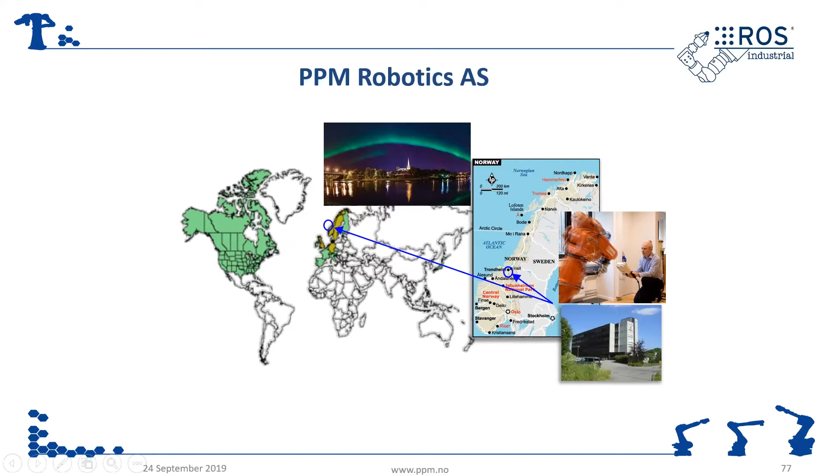We joined ROS around 2 years ago, I think, and we have had a lot of good experience using it. That's why we decided to support the ROS Industrial Consortium and become an active member, also developing and participating in several events.

We use ROS in almost every one of our projects now. We built up this knowledge from our previous projects, which included grinding, milling, welding, or palletizing projects. Currently we are developing technology for our partners for welding applications of huge structures, especially for hydropower turbine welding.

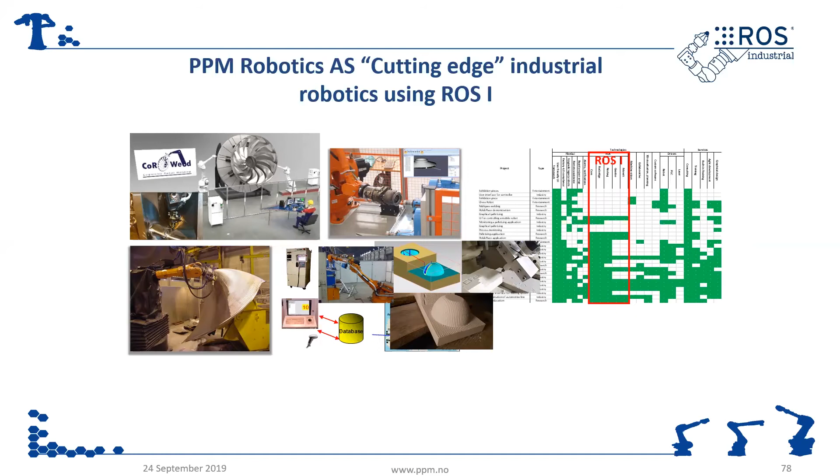So ROSWeld is for one-of-a-kind production robot welding. You will see at the bottom an ongoing process. This is from our previous project, but we developed it further in ROS and made it available for the community.

We focused on usability and also on enabling technology for multi-robot welding applications in ROS. What we want to achieve is the ability to plan, monitor, and control such projects, utilizing the advantages of ROS technology, but also extending the capability of our software and making it more compatible with different devices we encounter during integration at different sites.

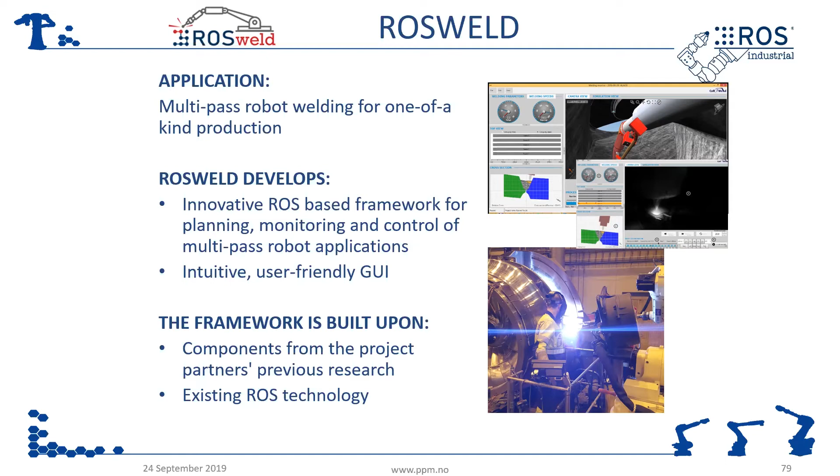So ROSWeld is an FTP project supported by ROSin Europe. We have 3 partners from Norway. We are the champion of the project, PPM Robotics, and we are coordinating the project and developing it.

We have a partner, Mechatronics Innovation Lab AS. It's the catapult center for industrial robotics in Norway. They're located in the South, and as their name suggests, it's an innovation lab for introducing new technologies to local companies. The other partner is Rainpower Norge.

They are our main manufacturing and industrial partner. They produce hydropower turbines, and we have had an ongoing collaboration since 2006. The project started last summer, and we finished the main development of the code. Currently we are working on integration and the application at our partners.

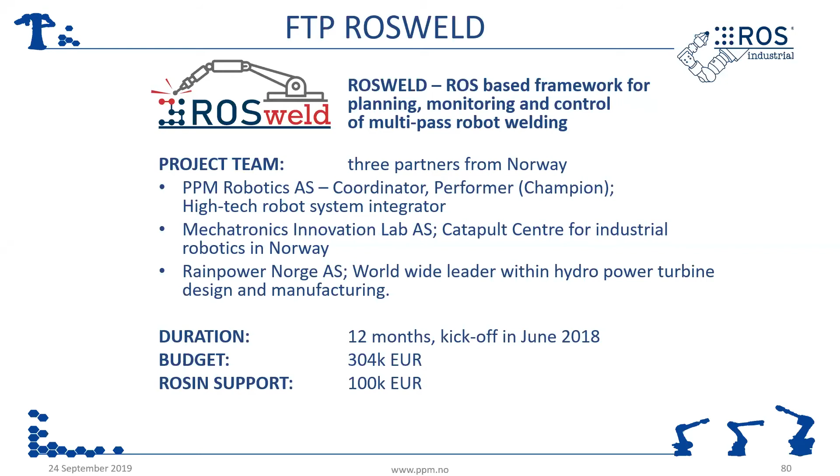So the main goal of the project is to bring this kind of software to an industrial level, as is general for ROS Industrial. We are aiming to bring the planning, monitoring, and control software. We are also integrating the components we would use for welding. Some of them are not integrated yet into ROS, so we deliver them as new, and also provide training materials as they become ready.

The pilot project would be at Rainpower, and the generic setup would be implemented at Mechatronics Innovation Lab.

So how is this software package built up? We created the user interface in FlexGUI, which is our user interface, and it is enabled to plan the process itself. Then we use the simulation tool to simulate the motion of the robot in the virtual environment and enable collision detection. Then the control integrates all the external hardware, including the robot arm, the welding power supplies, cameras, laser scanners, and input devices.

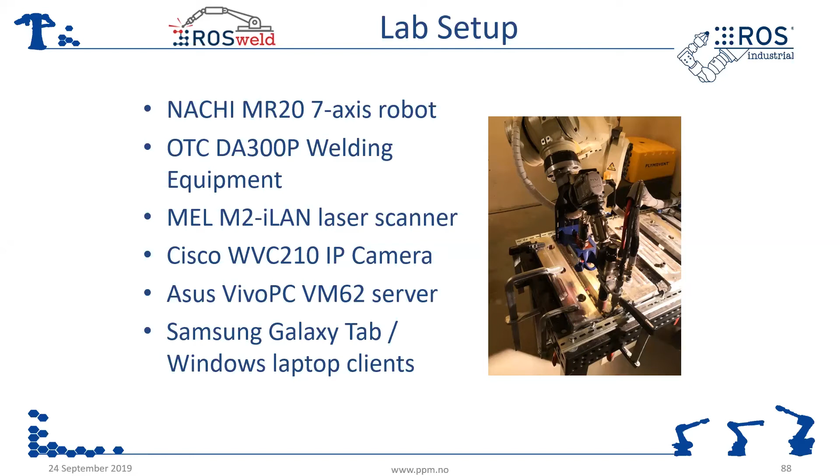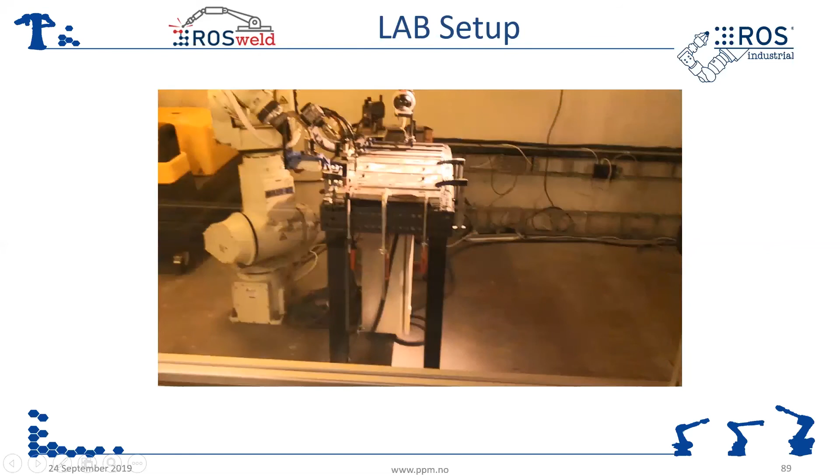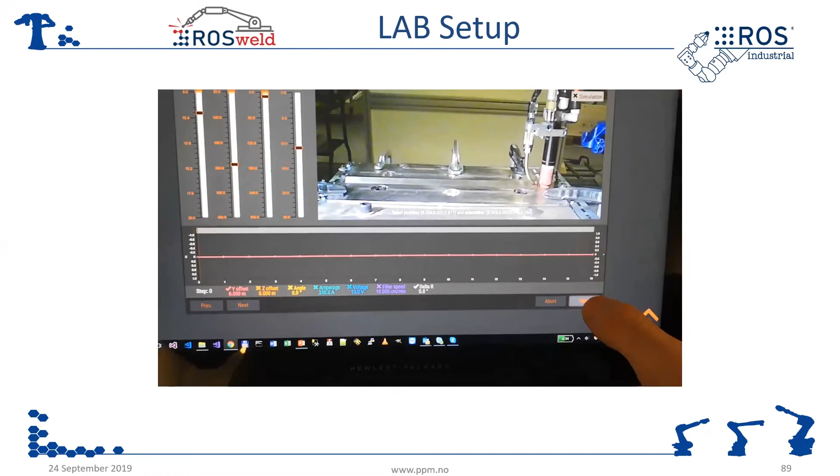So I hope we can start the video. Here you saw the planner module. You can monitor the main process in the picture, and you can set up the welding parameters and also follow the process on the bottom part.

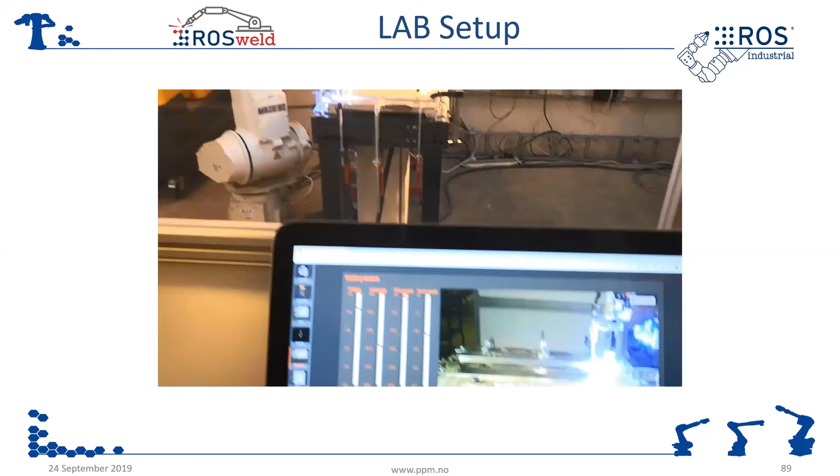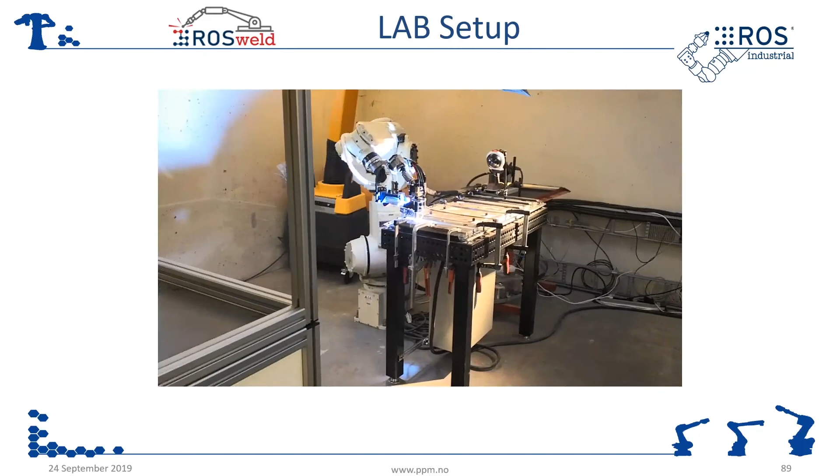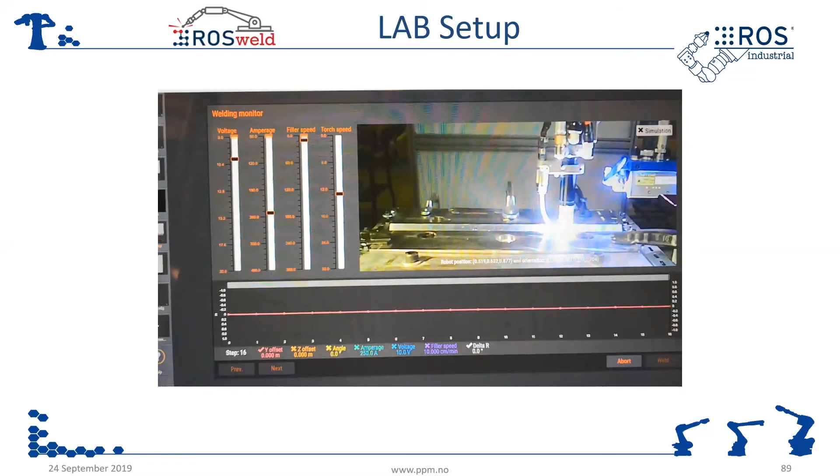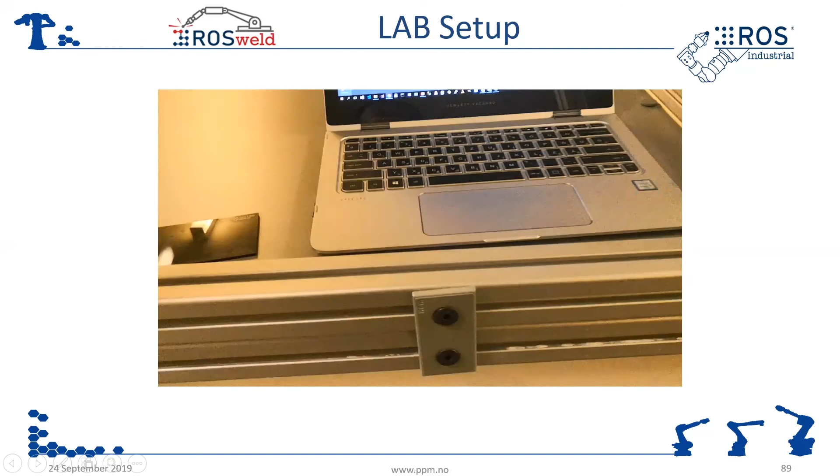This is the small setup we prepared for the demo purpose. Our goal is to be able to use it in more complex shapes, because, for example, the welding of hydropower turbine blades has a much more complicated shape than a straight line. But here you see the general proof of concept of the process. I think the video has ended. Yes.

So how does the project look? We set up 3 milestones. We finished milestone 1, which was the main part of the development. This was the integration of the software modules, the drivers, and the setup of the project, and also committing the code to the ROS community.

Second milestone is the multi-pass planner module, which we are still developing. This part could be replaceable by other parties, but our solution might not be totally open source. We are still considering how much we can utilize here, but we will do our best effort to share as much as possible.

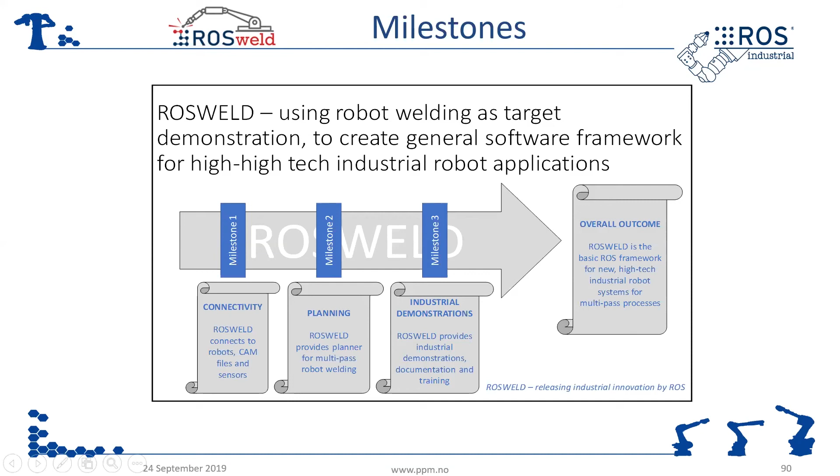It's already about to finish. Milestone 3 is the implementation of the demonstration cells at our partners at Rainpower and at Mill, which means we are still negotiating some technical details, so please stay tuned for updates. We will come back soon.